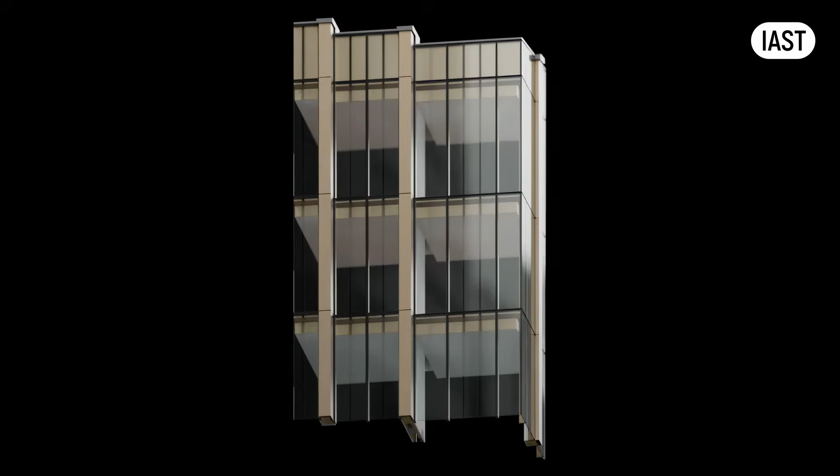What if I told you that most of the buildings where you live, work, or study are hiding a secret? A technology that didn't even exist a century ago, yet now is everywhere. Virtually every iconic building, from London's Shard to Dubai's Burj Khalifa to New York's One World Trade Center, relies on this hidden innovation. Imagine any modern cityscape. It's always right there in plain sight, yet invisible to most. Like the air we breathe, we heavily depend on it, but rarely notice it exists.

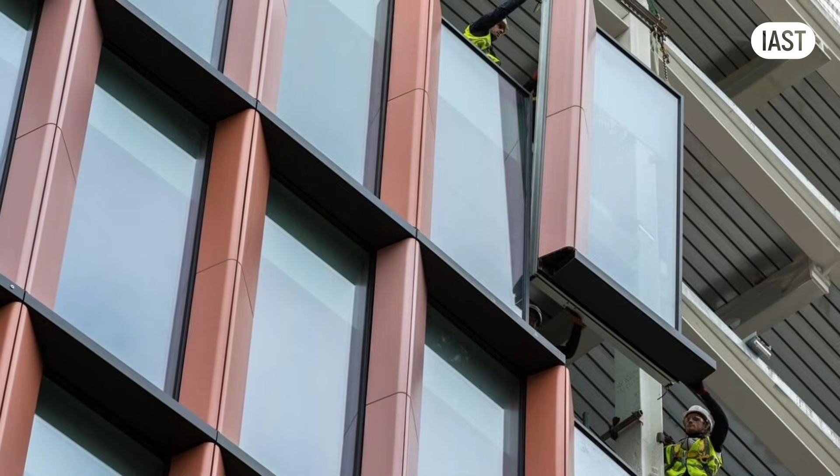This secret is the curtain wall. And thanks to recent advancements in unitized facades, today's curtain walls are almost unrecognizable from their original form, cleverly disguised to look like anything but the curtain wall. But how exactly did curtain walls evolve from simple glass screens into sophisticated high-tech envelopes dominating architecture today? This is a story of architecture's most influential innovation. By the end, you will understand exactly why curtain walls have become the backbone of modern building design.

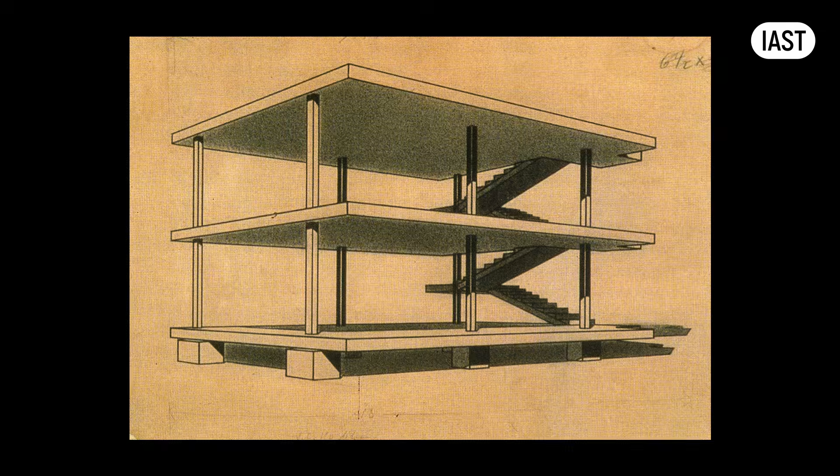To understand today's curtain walls, we need to go back to the beginnings of the last century. The term curtain wall originally described any non-load-bearing facade, whether masonry, glass, or precast concrete. The idea was beautifully simple: if the facade does not bear structural loads, it hangs from the building's structure like a curtain.

But then Walter Gropius designed the Fagus factory in 1911, introducing the first continuous glass corner in architectural history. This minimalist grid of vertical mullions and horizontal transoms became the DNA of modernism, industrial, alien, and utterly contemporary. This grid system, where apertures between mullions and transoms are filled with glass or opaque panels, became the most ubiquitous urban fabric element. Today, it doesn't matter if it's school, office, hospital, or apartment building, curtain wall can be used anywhere. It became the ultimate architectural mask.

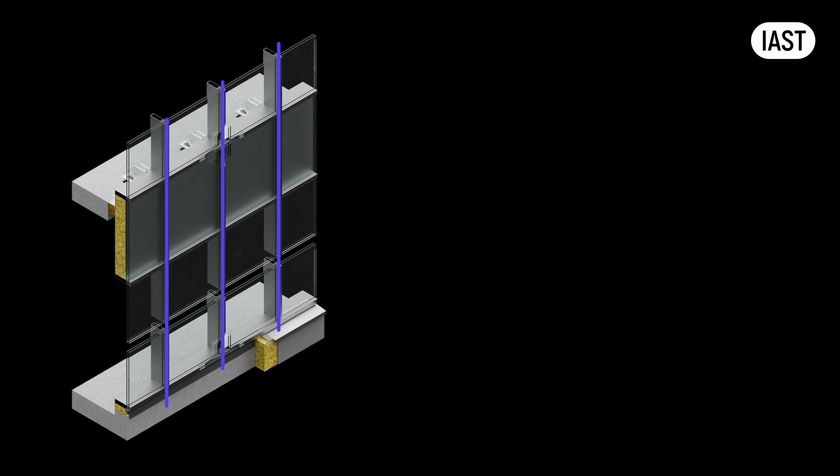The first true curtain walls were what we now call stick systems, and their fundamental principle hasn't changed in over a century. Vertical profiles, mullions, attach to the building slabs with brackets. Horizontal profiles, transoms, span between mullions, and glass or opaque panels fill the created apertures.

Here's the crucial engineering insight: the glass carries no structural load. It simply rests on horizontal transoms and is laterally secured around the perimeter of the aperture. The mullions and transoms transfer all loads back to the building structure.

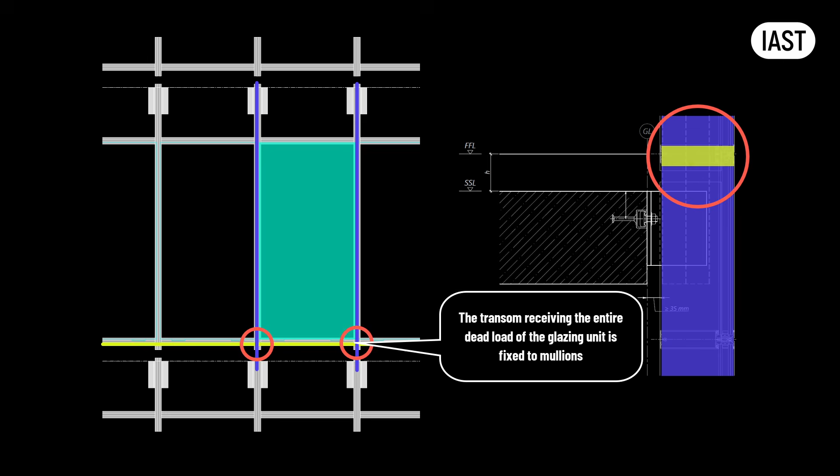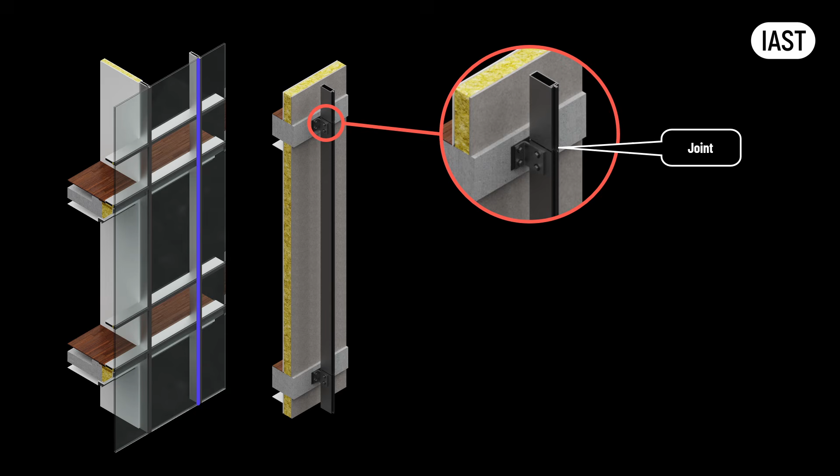But here is a critical detail that makes tall buildings possible: movement accommodation. Stick curtain wall mullions are split at every floor or every other floor and connected with spigots. These connections allow the facade to move up and down, accommodating both deflection of the building slabs and thermal expansion of materials.

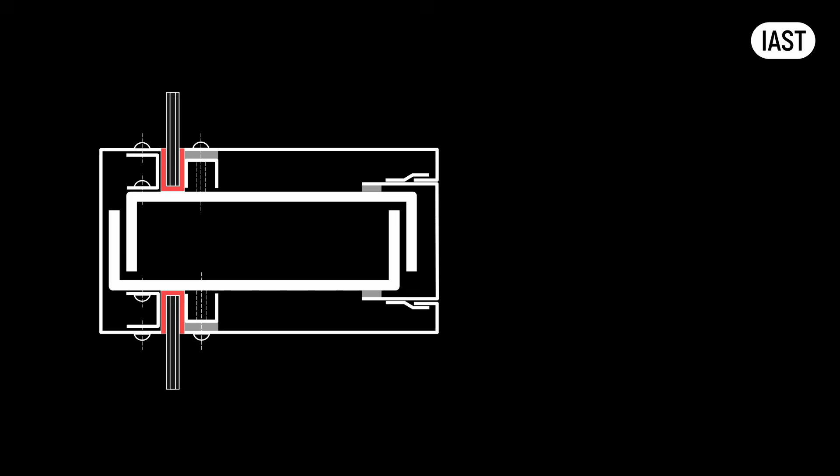Early curtain walls were designed as what facade engineers call perfect barrier facades, completely sealed envelopes preventing any air or water penetration. At least this was the plan. The glass and metal panes themselves were waterproof, but the joints were the weak link. Since facades hang from structure and move with the building's movement, early putty seals couldn't accommodate this motion. Putty is rigid. Buildings move, putty cracks, and you get expensive, leaky facades that nearly killed the curtain wall concept altogether.

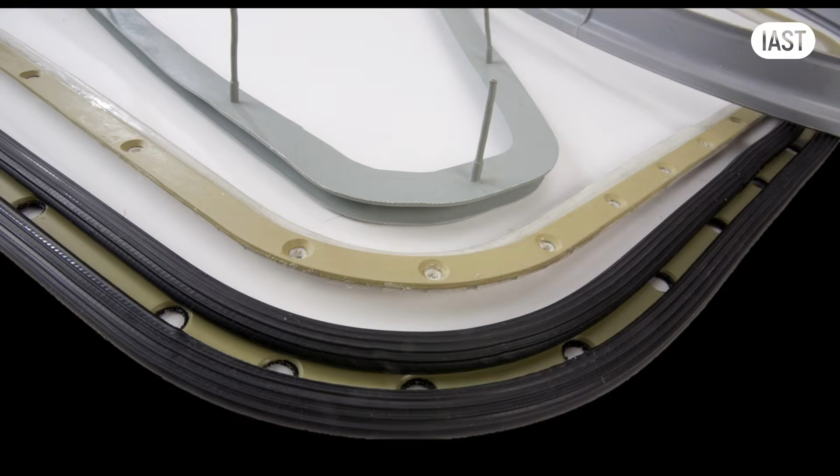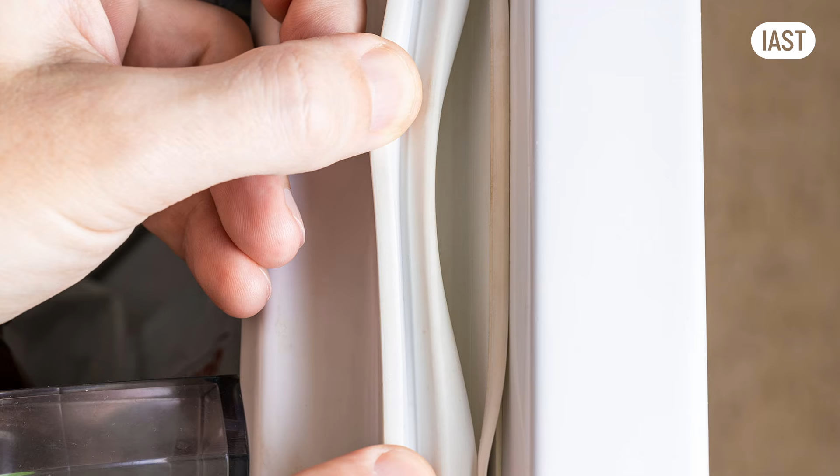The breakthrough came from an unexpected source: the automotive and aerospace industries. Silicones and rubber gaskets, originally developed for airplanes and cars, found their first adoption in buildings in refrigerator doors, and only in the middle of the 20th century were adapted for curtain wall and window seals. These elastic materials could accommodate movement while maintaining waterproof barriers.

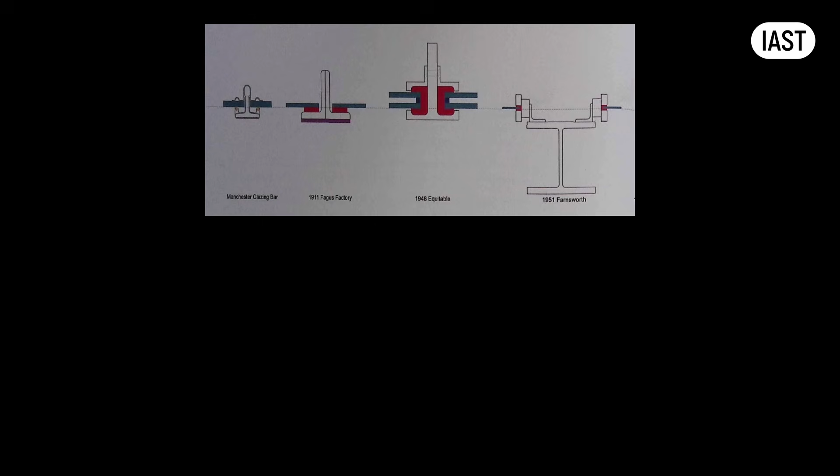But gaskets on their own could not solve the leaky joints. Early curtain walls were made of steel sections. These steel sections had very simple geometry, and they warped during the manufacturing process. Steel also corroded when exposed to water. All that created gaps. Worse still, metals are very thermally conductive and created horrific thermal bridges.

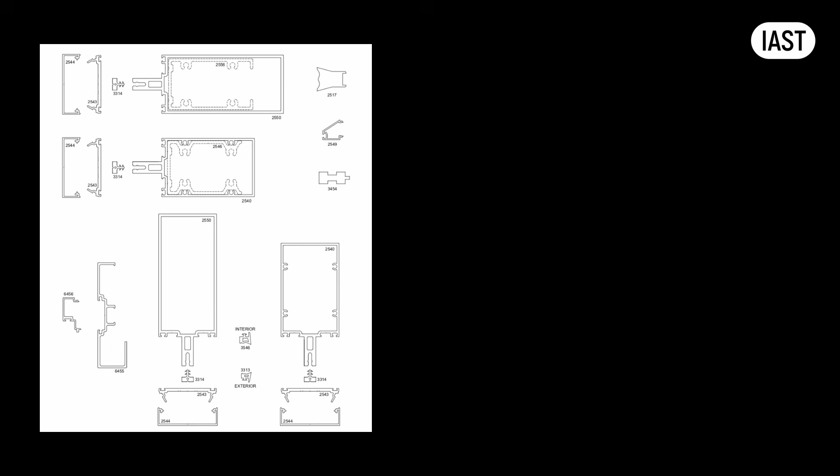The next breakthrough was aluminium, but not for the obvious reasons. Aluminium is even more thermally conductive than steel, and yes, steel corrodes while aluminium does not, and yes, extruded aluminium profiles aren't as warped as steel sections, but the real revolution was the precision. The Second World War resulted in significant advancements in aluminium manufacturing. Aluminium can now be extruded into very precisely shaped profiles with intricate details specifically designed to accommodate polyamide or plastic thermal breaks, and crucially, the gaskets required for air and weather sealing. Even though aluminium is more thermally conductive than steel, the precision manufacturing capability more than compensated for this drawback.

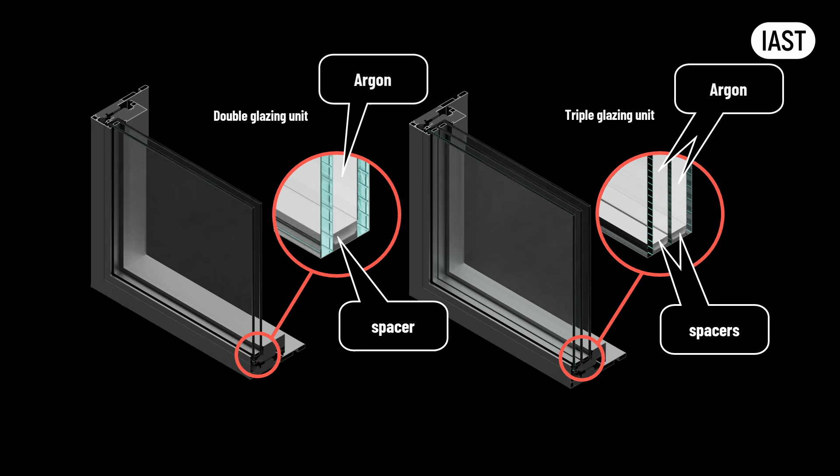Thermal breaks, small barriers of insulating materials inserted into aluminium profiles, prevent heat transfer. But the thermal problem wasn't solved by thermal breaks alone. The real game changer was structural silicones and glazing units. Glazing units aren't just multiple glass panes, they are engineered assemblies where glass panes are bonded together through spacers with gaps filled with inert gases like argon. This dramatically improved U-values, making curtain walls thermally efficient for the first time.

What was once cutting-edge, double-glazed units with 2 glass layers, is now considered subpar thermal performance. Today's building standards require triple-glazed units featuring 3 glass panes separated by 2 engineered cavities, each optimized for specific thermal requirements.

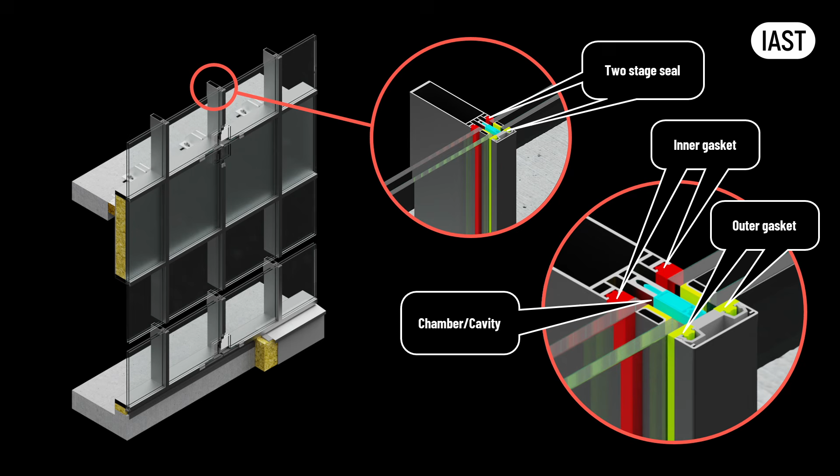Here's a detail most people never notice, but which makes modern curtain wall possible: the chamber between seals. Every glazing unit has an inner gasket between the profile and glass, and an outer gasket between pressure plate and glass. The space between these gaskets creates a pressure-equalized chamber that is drained through weep holes in the outer seal. This isn't just about keeping the water out, it's about managing the inevitable water that gets in. By controlling pressure differentials and providing drainage paths, this system ensures that even when the outer seal is compromised, water doesn't penetrate into the building. This principle, accepting that some water will penetrate and managing it rather than trying to create perfect barriers, was revolutionary in facade engineering.

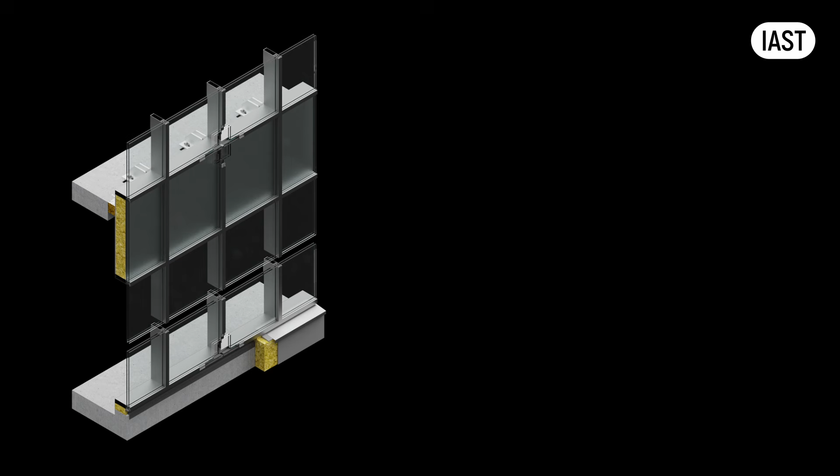So here's how modern curtain wall facades deal with air, water and thermal insulation. There are mullions and transoms holding the glass. The glass is retained to the profile with toggles, structural silicone or pressure plates as shown here. There is a thermal break between the pressure plate and the profiles. The first outer seal prevents most of the water from entering, and the second seal prevents air and water from getting inside the building. The chamber between the seals is drained through the weep holes at the outer gasket or silicone joint.

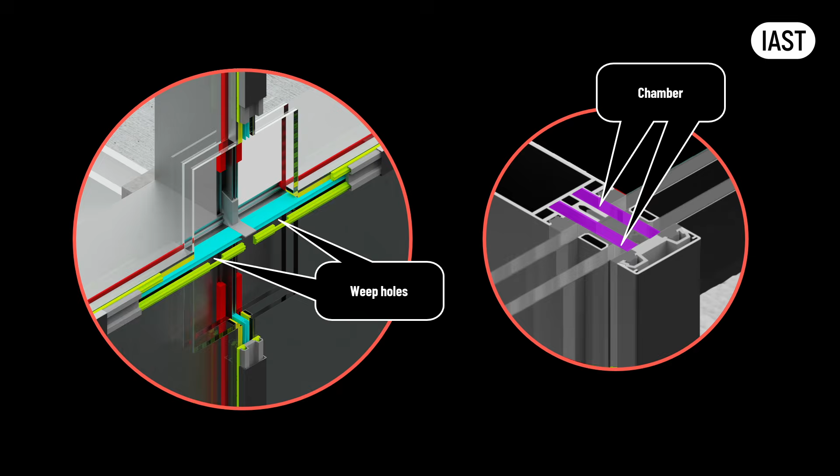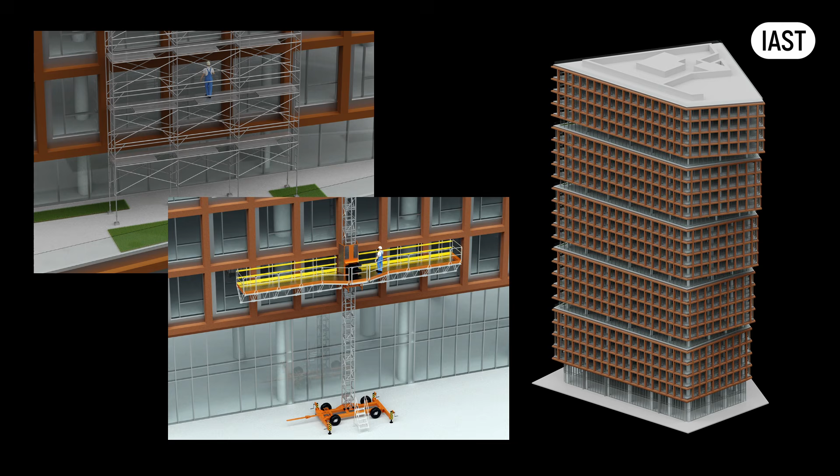As buildings got taller, stick systems hit practical limits. Imagine assembling a curtain wall piece by piece, 100 meters in the air, in all weather conditions. This system requires external access in the form of scaffold or mast climbers. For a 50-story tower, you spend at least 1 week to erect scaffolding per floor and another week to strike it. That's potentially 2 years just providing access to install facade.

Enter unitized curtain walls. Entire facade sections or units built in controlled factory environments, delivered to site and craned into position without the need of access externally. That saves months and years of construction program on tall buildings. But there is a fundamental difference.

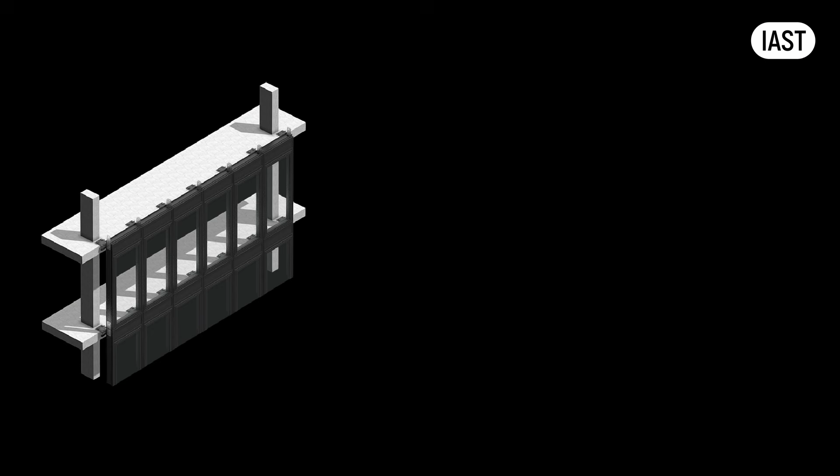Stick systems have continuous mullions, while unitized systems break that continuity. Each unit must connect to neighbors through sophisticated gasket systems and precise brackets. And the joint between the units is designed with similar two-stage seal philosophy, with the outer gasket allowing some of the water in and the inner gasket providing ultimate air and water barrier. These additional gaskets and highly engineered brackets are expensive.

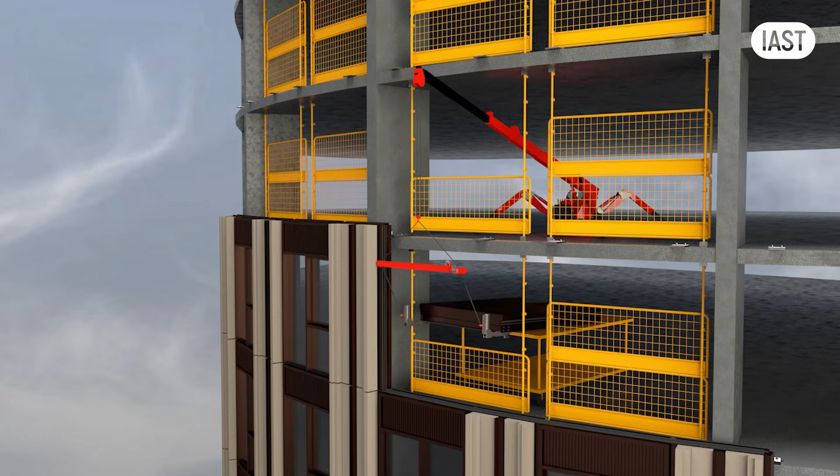However, the payoff is enormous. You can install 1 story per week with no external access required. For that same 50-story tower, you've gone from years of scaffolding to direct crane installation.

In unitized systems, the joints and gaskets between units do all the movement accommodation work. The facade still moves with the building, but now the movement is managed at the unit interfaces rather than within the continuous mullions.

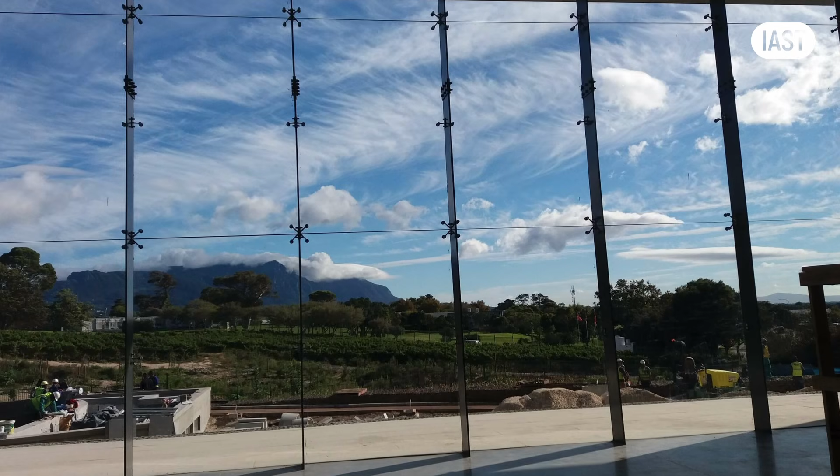As technology advanced, architects began asking, why do we need visible mullions at all? Spider curtain wall systems answer this question with engineering poetry. Instead of traditional grids, spider systems use point-fixed glazing. Glass panes are held by small mechanical connections at discrete points. These brackets look like spiders, hence the name.

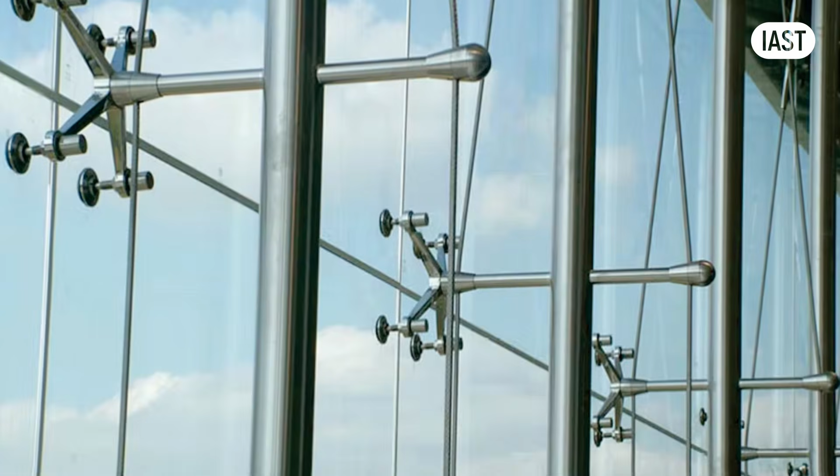These curtain wall screens typically connect to the tension cables behind the facade. This creates continuous glass surfaces. The structure nearly disappears. These facades are commonly suspended from the top rather than supported at the bottom. This allows the steel sections carrying dead loads to be extremely thin. The visual impact is dramatic.

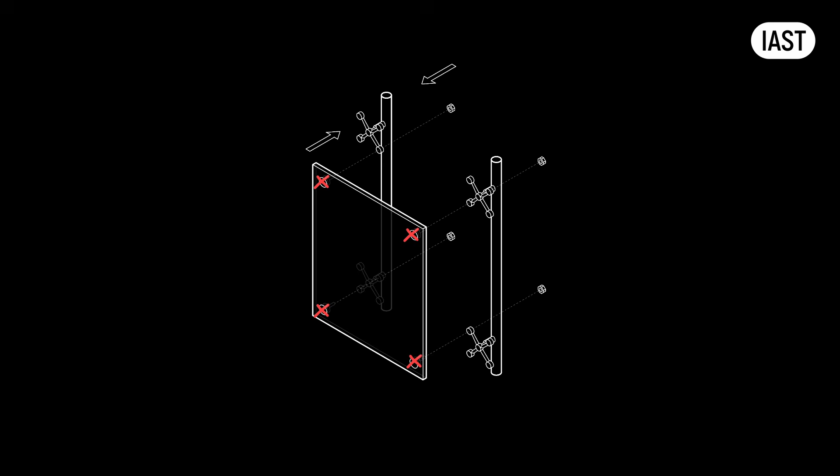To handle wind loads, the cables are kept in constant tension. This tension transfers extreme forces to the building structure. The glass panes are point-fixed. This makes stress within the glass much more demanding. The engineering challenge is significant. Both glass and building frame must do far more structural work. This requires entirely new glass types and connection methods. The technical complexity is enormous.

But there is a reality check coming. These facades are extremely expensive. They are almost always unique designs. They offer no additional thermal, energy or acoustic benefits. Their only advantage is aesthetics. We are seeing fewer of these systems as the industry matures. Performance and efficiency now drive design decisions. But it is important to understand what made these facades possible.

Floor-to-ceiling glass and point-fixed glazing in curtain walls demanded new safety standards. The stakes were suddenly much higher.

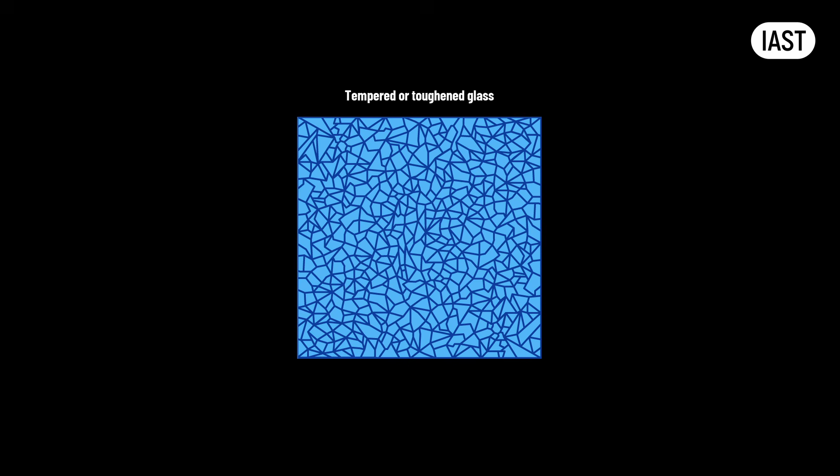Heat-treated glass emerged as the first solution. Tempered or toughened glass is heated to extreme temperatures and rapidly cooled, providing four times the strength of regular annealed glass. When it breaks, it shatters into small pieces, far less dangerous than large shards of annealed glass.

But for all-glass facades, even small pieces weren't good enough. When glass serves as a barrier protecting people inside, it must do more than just be strong. It must stay in place and continue serving as a barrier even when broken.

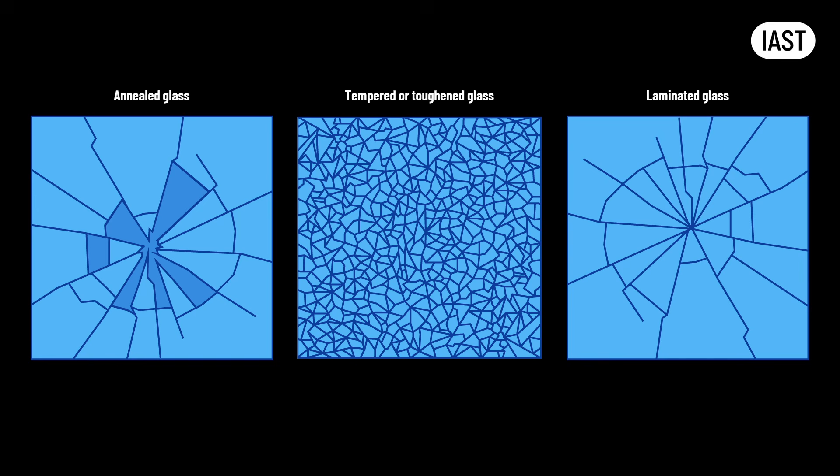This became possible with laminated glass. Multiple glass layers are bonded together with a transparent film, which the industry calls an interlayer. When laminated glass breaks, pieces remain stuck to the plastic film, and the barrier stays intact until replacement.

These advances made all-glass facades not just possible, but practical. They transformed glass from a fragile material into a reliable structural component. Think about this for a moment: floor-to-ceiling glass skyscrapers would have seemed like pure fantasy just 70 years ago. Today, they are so common we barely notice them. Glass became so strong and reliable that it could serve as a primary structural component in some buildings. The impossible became routine. But there were still a few considerations to solve.

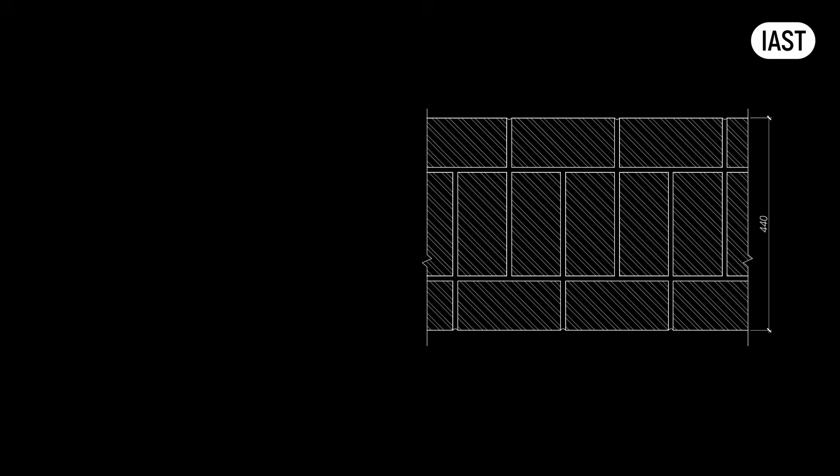Unlike thick masonry or concrete facades, curtain walls are lightweight. They lack the mass that makes traditional walls good sound barriers. The solution came through already familiar technologies: insulated glazing units and laminated glass.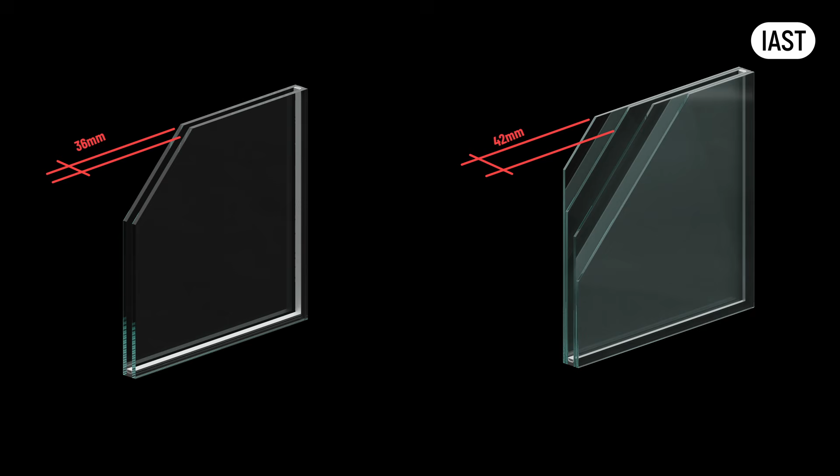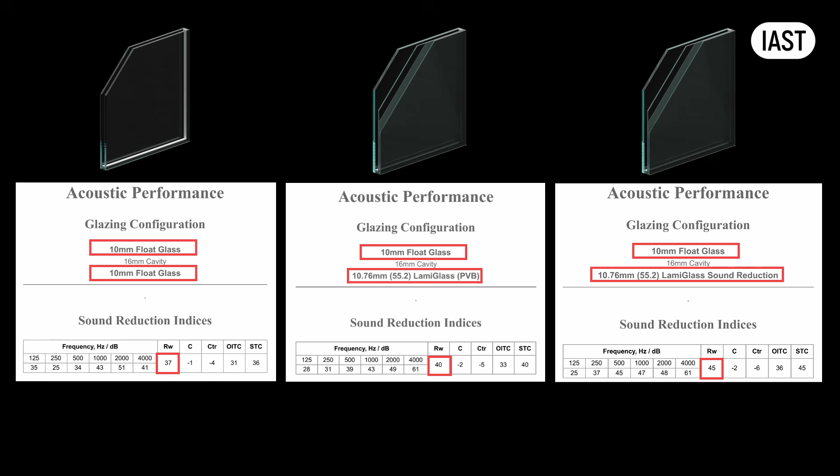The principle is simple: more glass panes mean more mass, and thicker glass means better sound insulation. Separation of panes with spacers and gas chambers adds to acoustic performance. Surprisingly, the film interlayer in laminated glass helps enormously, acting as a sound dampener between glass layers.

Here's where it gets clever: combining different glass thicknesses and spacer widths within one glazing unit makes it asymmetrical. This reduces resonance, and acoustic insulation improves even further. As a byproduct of thermal and safety improvements, facade engineers solved the acoustic problem too.

But curtain wall grids created a new acoustic problem: flanking sound transmission. Traditional masonry facades did not have this issue. Noise travels through the facade structure itself - hollow mullion tubes can transfer sound from floor to floor, and transoms spanning between neighboring apartments do the same thing.

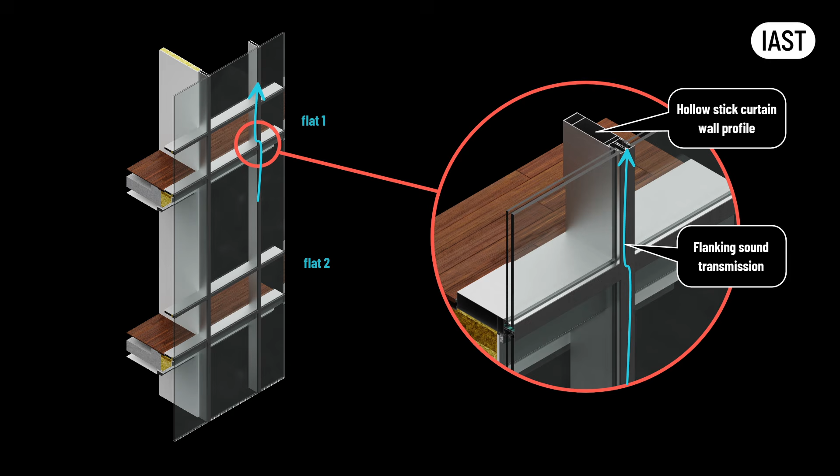In stick curtain walls, mullions could be split between floors to break the sound paths, and hollow profiles can be filled with acoustic inserts. Unitized facades had a built-in advantage: profiles are already split and separated by gaskets, creating natural sound breaks between units.

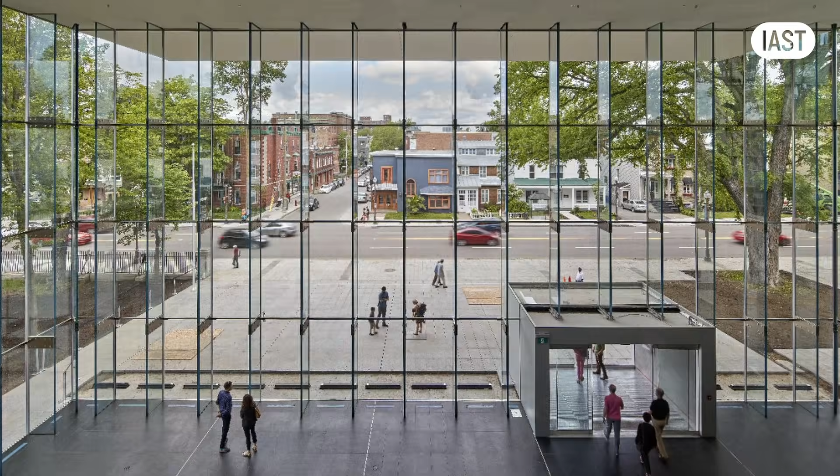With acoustics and thermal insulation problems solved, we finally cracked the code. All-glass curtain wall facades were unlocked, and light could flood inside buildings. But this created a problem in itself: overheating.

The first all-glass structures weren't built in the 20th century - they were much older. But they weren't homes, factories, or offices. They were greenhouses. They allowed all solar light in and kept the heat trapped inside. In greenhouses, that's a feature. Modern all-glass facades created the same greenhouse effect - buildings became solar ovens. In glass buildings, it's a bug.

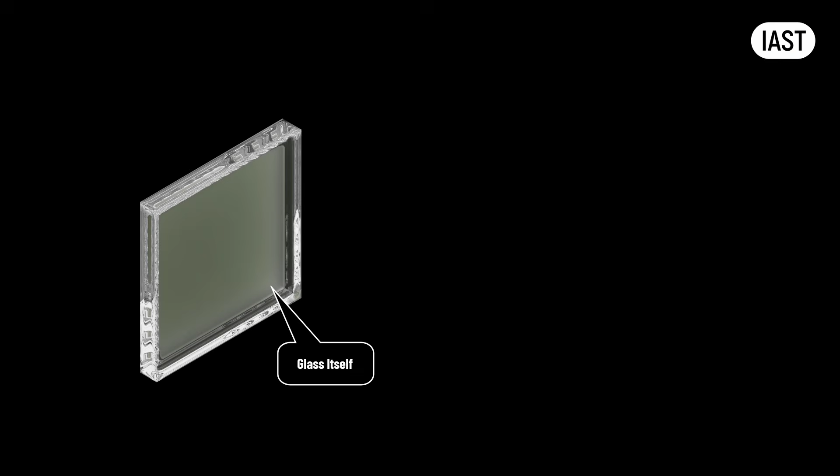However, this problem was promptly solved in the second half of the 20th century. The solution was air conditioning. But these buildings became prohibitively expensive to run. Having high-performance glass coating helped somewhat, but the only way to truly minimize overheating is solar shading outside the facade.

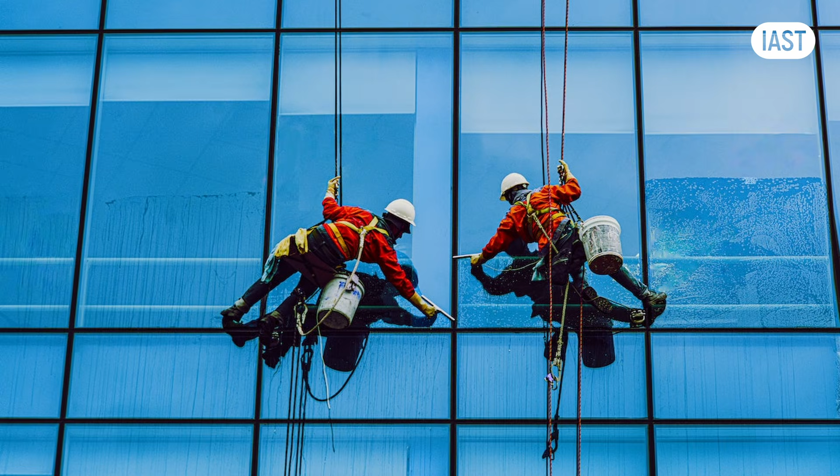External solar shading, called brise-soleil, works effectively, but it requires regular maintenance. It also compromises the pure all-glass aesthetic that architects wanted. And there's another problem: solar shading gets in the way of maintenance personnel. Try cleaning glass when you're suspended from a rope - now add a horizontal shading element blocking your path.

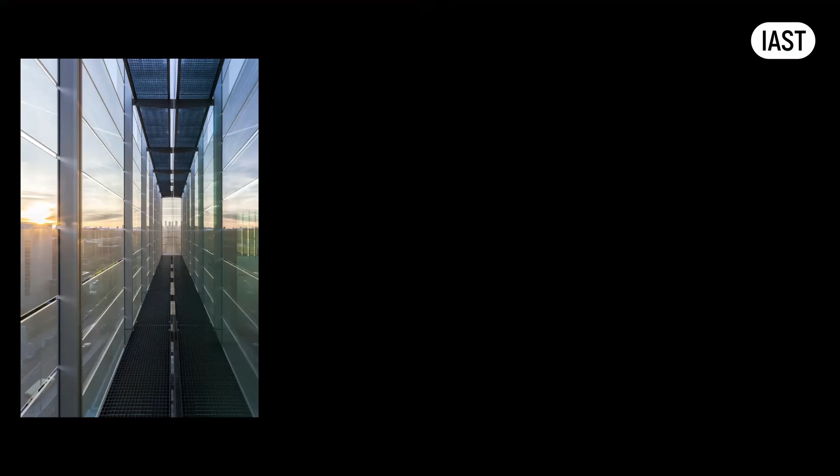The solution was double-leaf curtain wall facades - essentially curtain walls within curtain walls. Solar shading sits protected in the cavity between them. It's an elegant engineering solution, but it's very expensive - you're effectively building two facades instead of one.

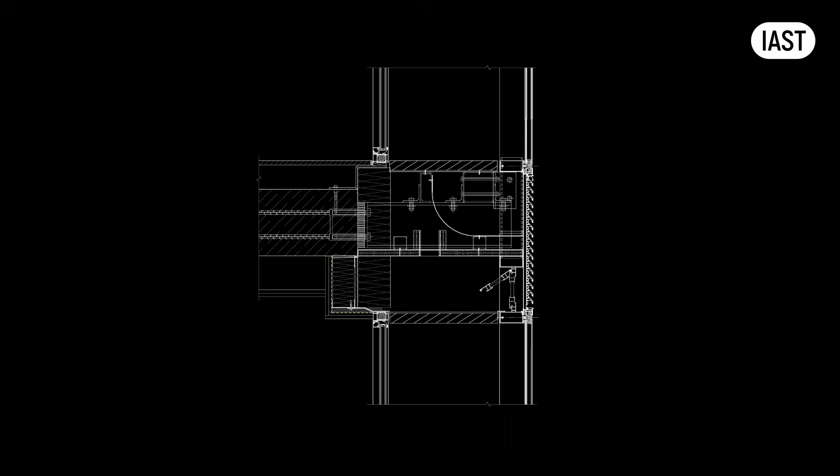Most importantly, these facades work for offices but are hardly suitable for residential applications. People want to open windows in their apartments, they want balconies, they want connection to the outdoors. Double-leaf facades can't offer that - the inner leaf is typically sealed, with no operable windows and no direct access to fresh air. That, and the extreme cost of these facades, made them a rare breed.

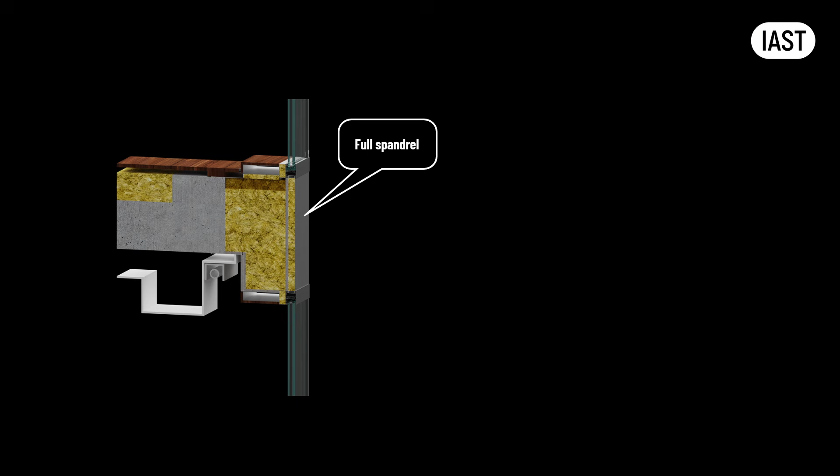But one of the main problems with all-glass facades is fire safety. It's now possible to create all-glass facades without any opaque areas, not even in the spandrel zone between floors. The so-called single transom or zero spandrel detail is highly desirable to architects, creating the minimal look of pure all-glass facades.

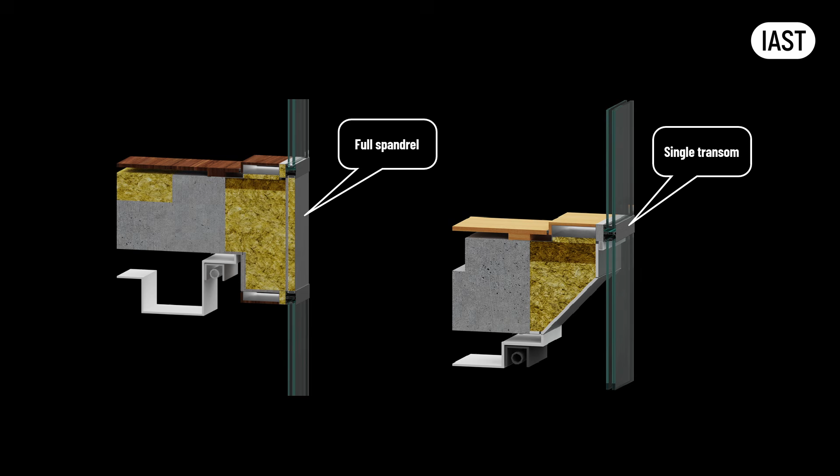Stopping flanking sound transmission is manageable - split the profile or fill them with acoustic inserts - but stopping fire propagation is a different challenge entirely. With zero spandrel all-glass facades, fire destroys the glass in minutes, then leapfrogs from one floor to another. In most countries, these all-glass facades are effectively banned.

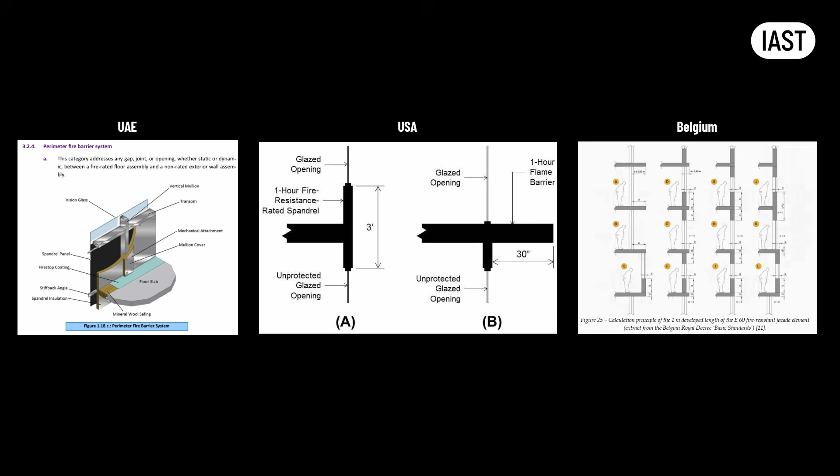Building code mandates a minimum spandrel zone dimension between floors. The aesthetic dream crashes into safety reality.

However, some countries still allow these details, but these buildings require active fire protection. Sprinkler systems minimize the risk of fire propagation between compartments. That adds significant costs.

All-glass facades are expensive. They are not thermally efficient. They require extensive engineering to mitigate created risks. The cost-benefit equation doesn't add up. And quite frankly, they are going out of fashion - they became so ubiquitous that glass buildings are no longer a miracle. They are rather boring. The novelty has worn off.

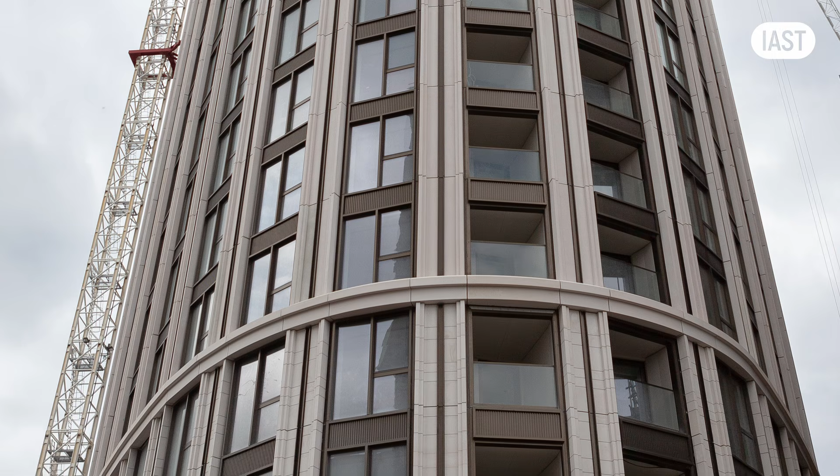To address costs and changing architectural fashion, curtain walls evolved even further in recent decades, particularly unitized curtain walls. They changed beyond recognition, so much so they are now commonly called unitized facades.

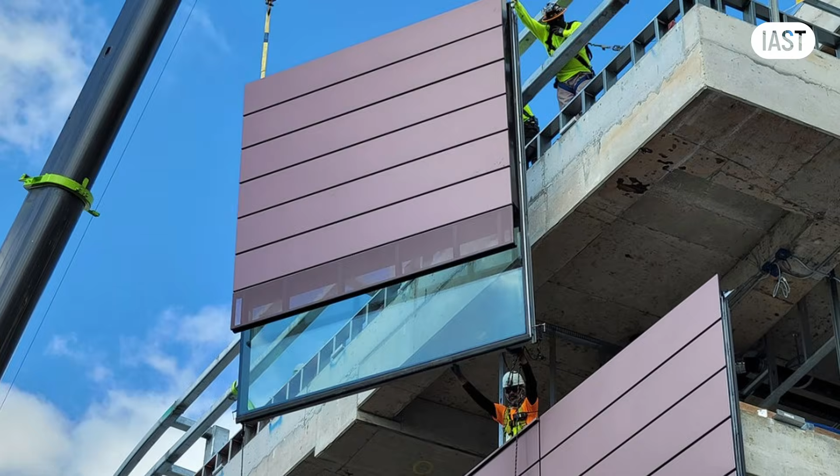Today's unitized facades can masquerade as anything. Modern unitized systems deliver all prefabrication benefits while appearing as rainscreen cladding, traditional masonry, precast concrete, or any architectural vision.

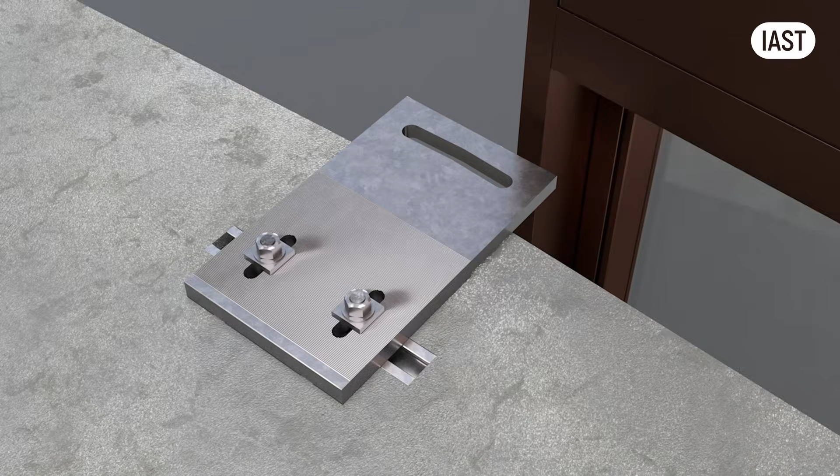They are the same frames made of mullions and transoms with gaskets between them, attached to the buildings with intricate, highly engineered brackets. Openable windows are placed within these frames, even balustrades attached to them. But all that structure is hidden by decorative elements.

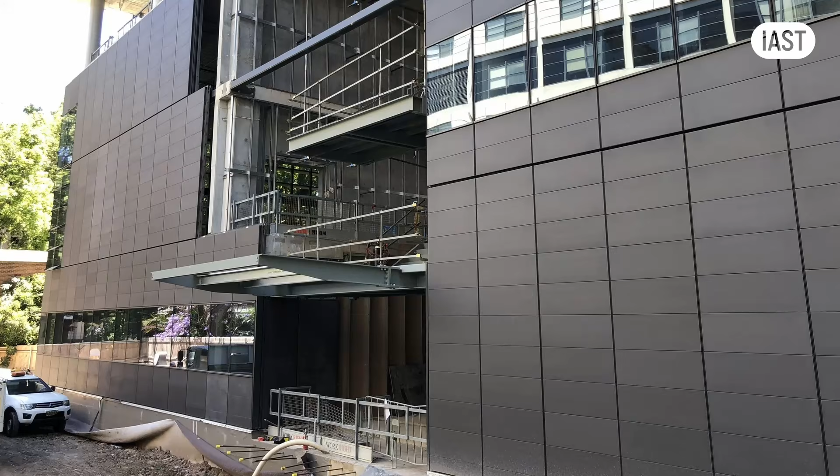The glass area decreases to about 40% of the overall facade. The rest is filled with insulated aluminium panels and covered by rainscreen cladding. The options are endless: decorative metal, brick slips, stone cladding, terracotta tiles, or glass-reinforced concrete panels. Any combination thereof—the possibilities are limitless.

This is curtain wall evolution's ultimate achievement: high-performance prefabricated envelopes adaptable to any architectural style. Most of the time you can't even tell it's a curtain wall facade. The structure disappears completely behind the architectural expression. The engineering becomes invisible and the performance remains exceptional.

This mastery of global supply chains and prefabrication unlocked curtain walls' key to widespread adoption. They can be manufactured anywhere, shipped globally, and assembled with relatively modest skill requirements.

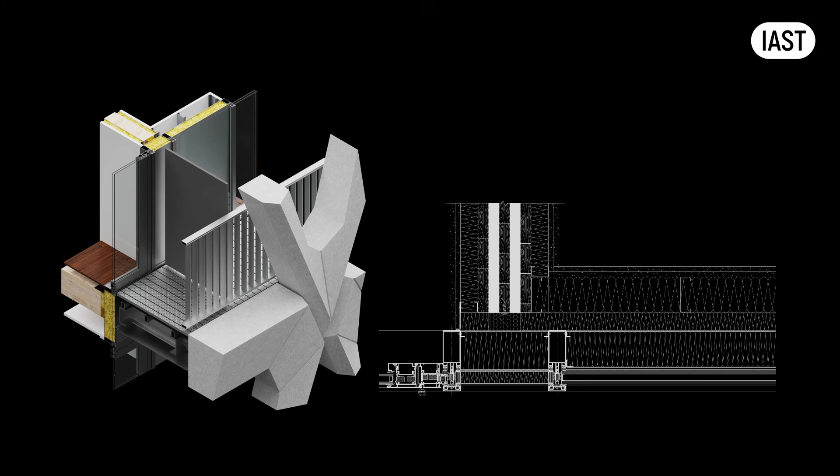Modern curtain walls aren't perfect. They are approaching fundamental thermal limits. Insulation can only be added to the opaque areas between profiles. Adding it behind the vapor control layer risks moving the dew point temperature inside the building, creating interstitial condensation problems. If we are serious about highly thermally efficient facades, we may have reached curtain wall limitations and we have to innovate even further.

New breeds of unitized facades are emerging. Some use glue-laminated timber as structural profiles instead of aluminium box sections. Wood offers better thermal performance and a smaller carbon footprint than metal, but it has its own issues with moisture control and fire safety. Whether these facade breeds will survive this step of evolution remains to be seen—innovation doesn't guarantee adoption. Performance, cost, and constructability still rule.

Retrofitting existing facades represents our biggest future challenge. Curtain wall facades built in the 20th century are approaching their end of life and need retrofitting to match new energy standards. Here's the problem: it's impossible to fit triple glazed units in frames designed for single panes of glass. The dimensions simply don't work, and the structural capacity isn't there.

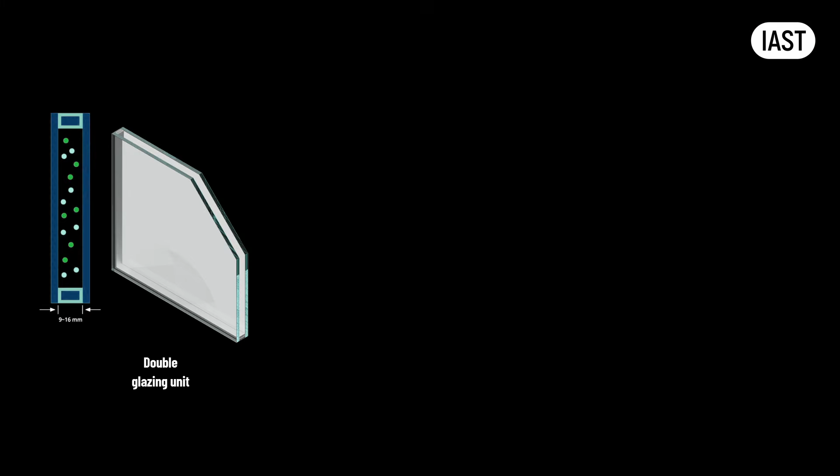This is driving innovation in areas like vacuum glazing. These units can fit existing frames while dramatically improving thermal performance—they're engineered specifically for retrofit applications.

We are no longer focused on building outlandish new designs. We are becoming more future-orientated, gradually improving existing systems while addressing millions of square meters of older facades needing upgrades. New facades are now designed with future retrofits in mind—parts will be repurposed or recycled. Sustainability drives design decisions. Curtain walls have become the backbone of globalized construction.

They address labor shortages, quality control issues, and increasingly complex performance requirements. They can be fabricated anywhere and assembled with relatively low-skilled labor. But unlike iPhones, you cannot replace building facades every year. Innovation cycles are long, and the consequences of mistakes are measured in decades. This is why facade engineering moves cautiously—every innovation must prove itself over time.

The next time you walk through a city, look up at those facades around you. You are seeing nearly a century of engineering innovation. Each building represents thousands of small breakthroughs that collectively transform how we build and live. All facade types have their place in this ecosystem.

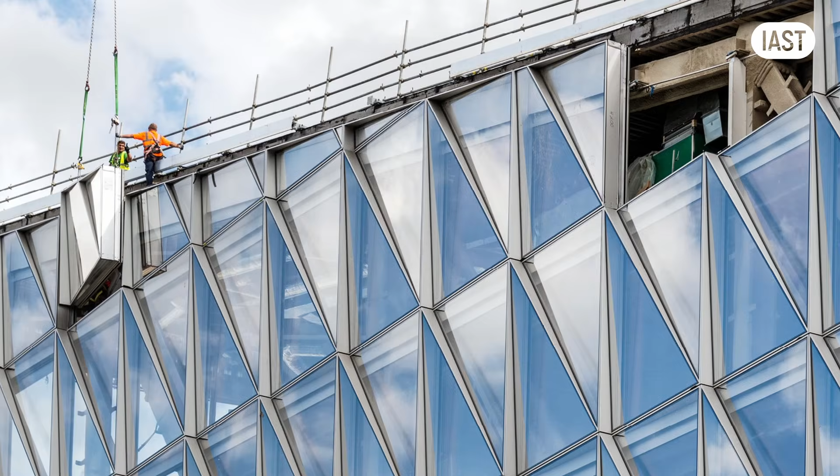The curtain wall revolution isn't over. It's evolving to meet new challenges of energy efficiency, climate resilience, and global construction demands. From Walter Gropius's first glass corner to today's sophisticated unitized systems, curtain walls continue reshaping our built environment in ways both visible and invisible.